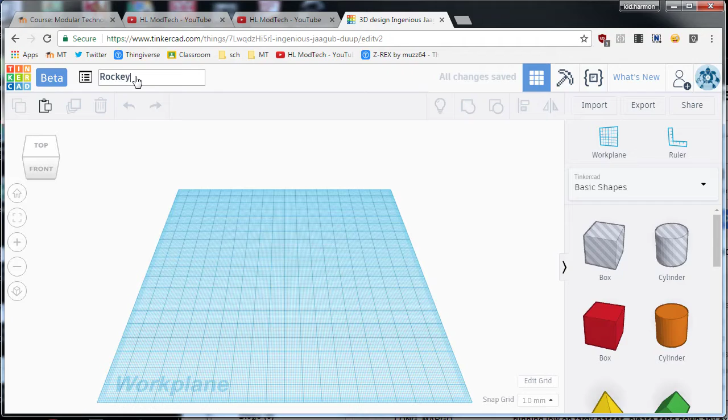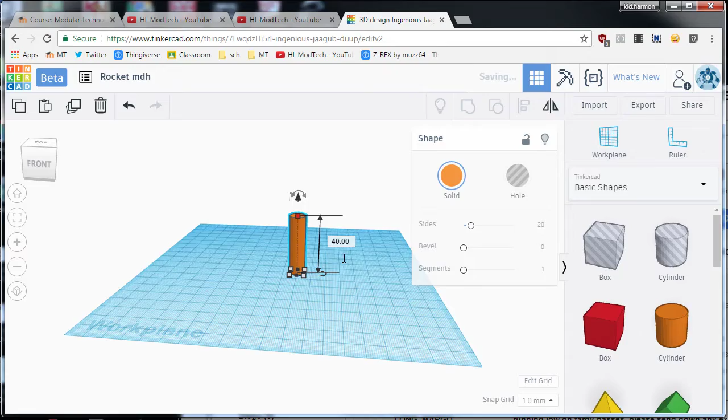Let's start by adding the body of our rocket, which is a tube, and let's make our rocket 10 millimeters thick by 10 millimeters thick, and let's make it 40 millimeters high. That's a good body for a tube. You can click this to zoom in and get a good look at it.

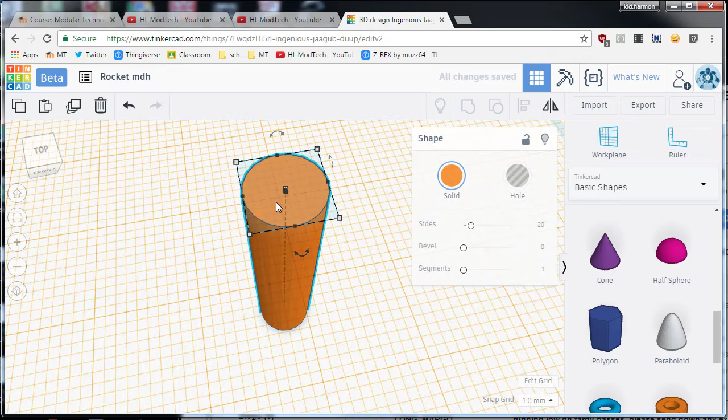At this point, we want to put a top on our rocket. The best choices probably are the sphere, the paraboloid, or the cone. Whichever one you pick, you want to set your work surface to right here though. So let's press W and set the work surface up there, and then take your pick for which one you want to put on. When you put it on, remember we made those 10 and 10, so you simply click the boxes and put your 10 and 10 again.

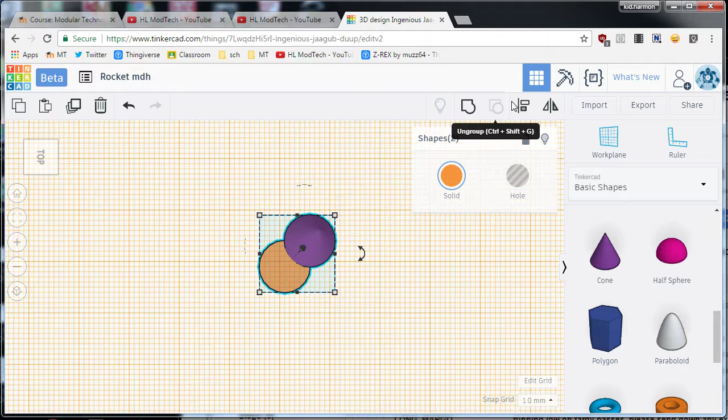If you go to top view, you can see that they're not aligned. But if we drag a large box, we can quickly grab both, hit align, and go center, center so that it looks good. If you switch to your side view, you can see that now it looks like a rocket. We can shut off that work plane by hitting W on the screen.

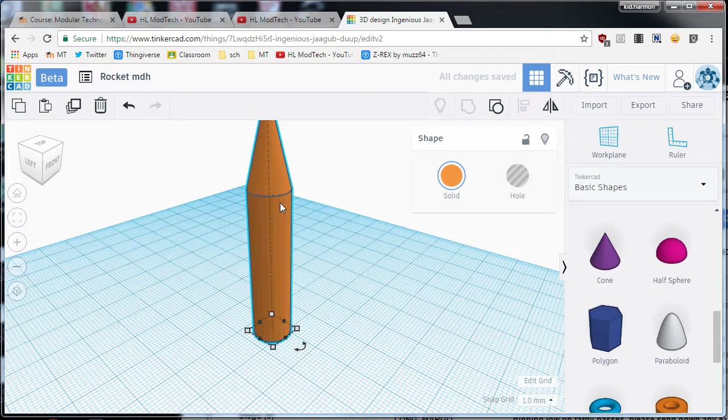We probably want those to stay together, so let's take them and group them. If you don't want them to be the same color, you can click on the color tool and turn on multicolor so you can still keep your colorful rocket.

At this point, let's add our fins. You can make your fins out of the wedge. The nice thing about the wedge is when it comes in, it actually looks like a fin. If you grab these handles, you can shrink it however you want.

I'm going to change my height. Since my whole rocket's 40, I'm going to make my fin 10. And I'm going to change this height. I love typing the numbers because it shows up exactly how I want. And then you can simply grab and drag your rocket fin into place.

When you click on that first one, you can do Control D. And there's an awesome tool called Flip where you can flip the other one. And then I'm going to use the arrow keys to move the new one to the other side.

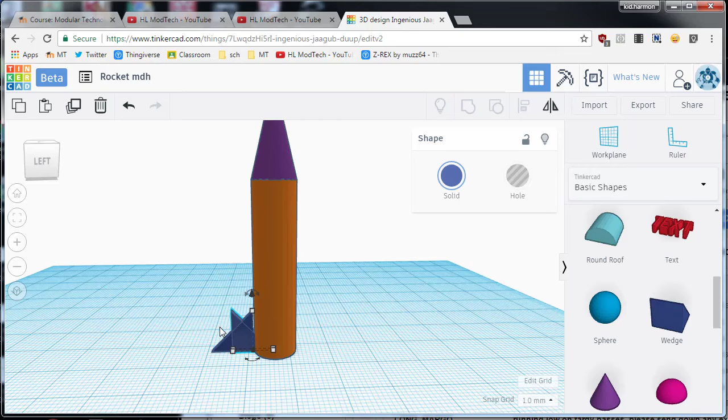Now, if we're ever going to 3D print these, you want them stuck inside the shape one click. And we also want to make sure that they're on the center. Now, I got lucky and mine were, but I'm just going to click on them and do Align, and make sure they say center.

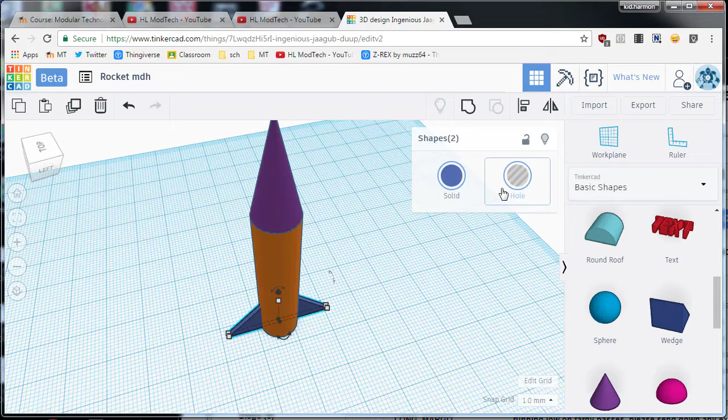And I need to duplicate those, so I'm going to do Control D again, and then I'm going to use the Rotate. Notice these tick marks, I'm moving out to the long tick marks, not the little ones. Those go all wackadoodle numbers. These snap to the easy 90, 180, 270, etc.

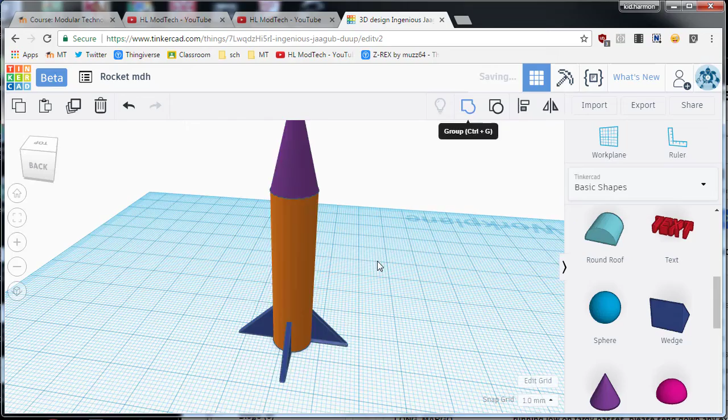Now my rocket's fins are pretty groovy. I am going to group all that, and it kept the multicolor, which is extremely cool.

Real quickly, I'm going to put USA on my rocket. When I drop this out here, notice it's not aimed. I want to do USA up and down. So I'm going to hit delete, and click right on this with the W key. And now when I bring the text out here, it's actually aimed that way.

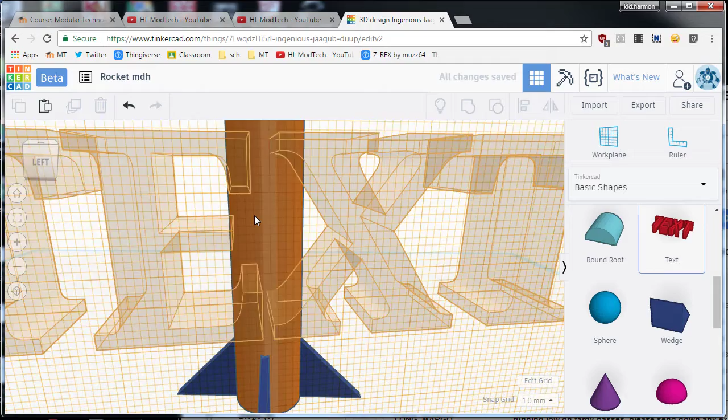And then I'm going to do a U, but I want it capitalized. And I'm going to shrink that down so that it's going to cut in nice. I'll use my arrow keys to line it up so I'm happy.

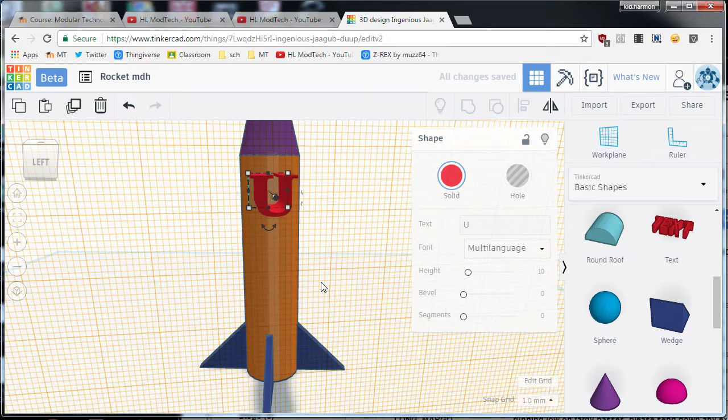And I'm going to cut the U into the rocket. So if you see here from the side, I'm going to push it in 2 millimeters and make it a hole. Since it's going in 2 millimeters, I can change this thickness to only 3 millimeters, so that way it's poking out, but it's not sticking out a mile.

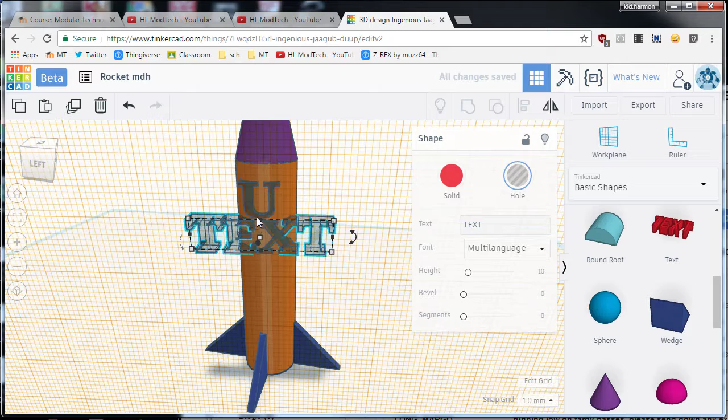Now I'm going to do Control D and bring that down and make it say S and press enter. Let's see if I can do Control D this time and bring it down, and there's my A. But I got to change it to say A.

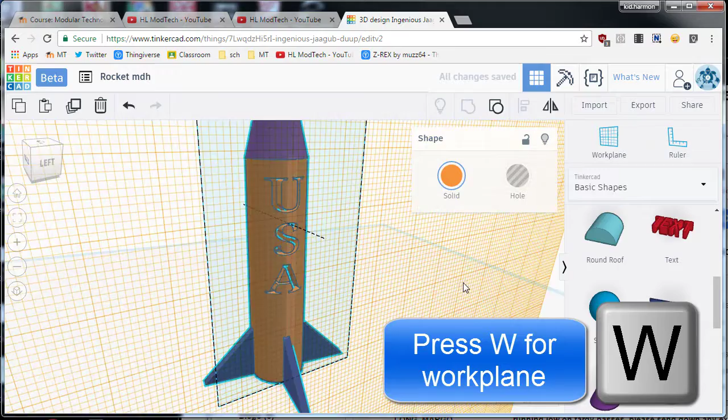So with those letters added to my rocket, I can now group them, and it will cut USA out of my rocket. I'm going to press W to shut off the work plane.

Alright, ladies and gentlemen, you can extend this many ways, doing many awesome, cool things, but this is one of my favorites. I'm going to switch so that I can see it from the bottom. I'm going to press W so that my work plane is underneath my rocket, making sure that I'm on the flat underneath part.

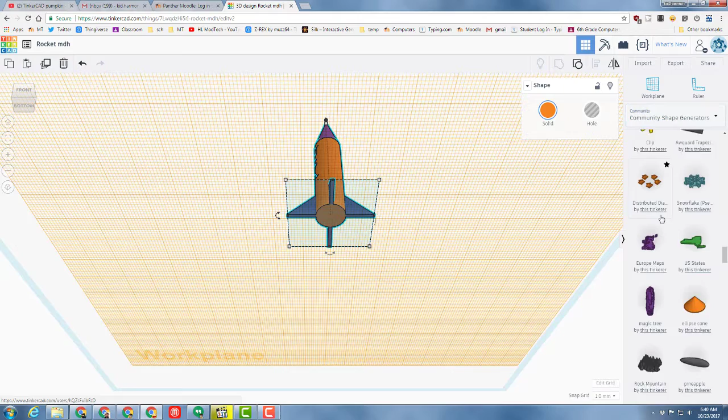And then I'm going to go to a cool place called Community Shape Generators. When you scroll through the list, you'll find one called Rock Mountain. And what's cool about Rock Mountain is right now it's crazy huge, but if you shrink it down so that it fits underneath your rocket, it makes pretty sweet looking flames.

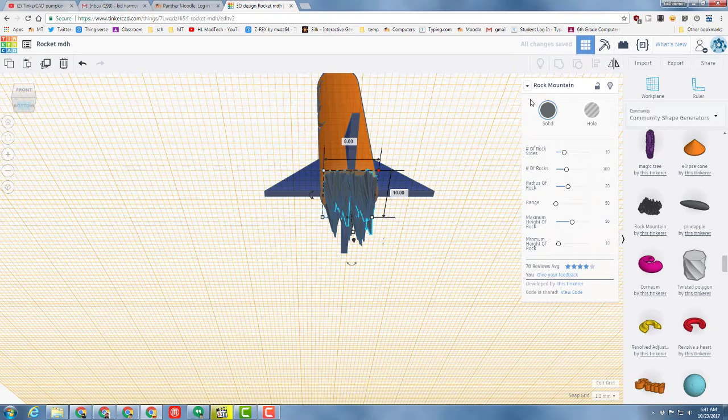But when you get it to the right size and switch it to a cool color that's more like flames, it is a pretty epic effect. I'm going to press W and click away to shut off my work plane, and you can see that now it looks like my rocket is launching.

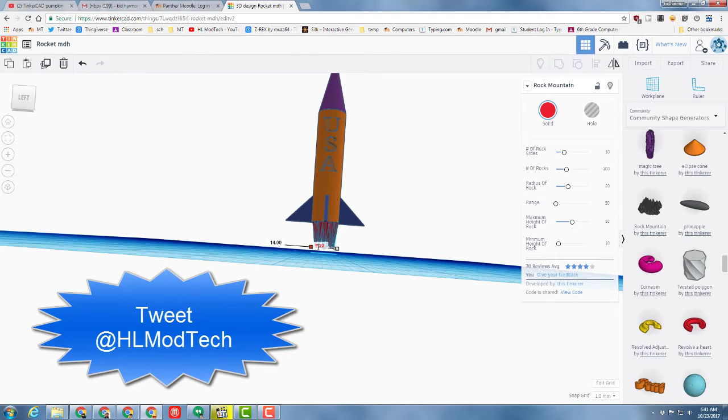So have fun, see how epic you can make yours, explore, see what other cool kind of things you can find, and pat yourself on the back for creating an epic, awesome rocket.